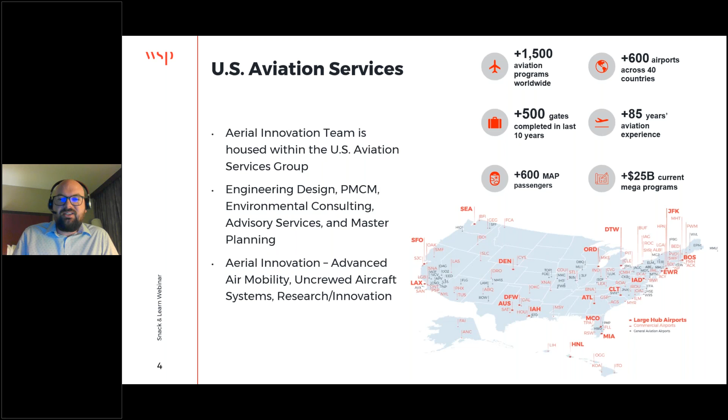Paul did a lot with drones and how drones are used across state transportation systems here in the United States and at airports. And then those last two, perhaps you joined me in a previous webinar. I did one with Brett where we talked about how drone package delivery could really help the rural areas in a regional setting for logistical systems, and help with things like food deserts or medical transportation, medical supply transportation, things like that. And then my most recent one, I talked about the scalability of advanced air mobility and kind of what has to happen there.

We talked about some best practices and planning for AAM from a systematic standpoint. So in a way, these all kind of come together in today's presentation.

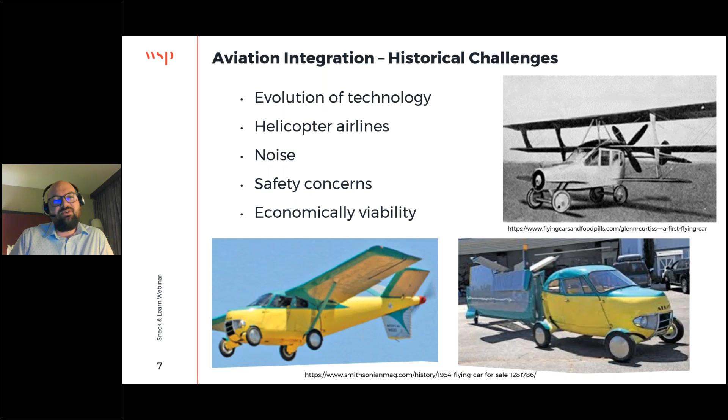And you had an option, through that airline, to add on the flight from the Pan Am helipad to JFK. So it's kind of an add-on to your ticket. New York Airways had partnerships, and you could go to the Pan Am building to fly in a helicopter to JFK. These are still happening today, but on a smaller scale. It was really a robust, scaled operation back in the 50s, 60s, 70s.

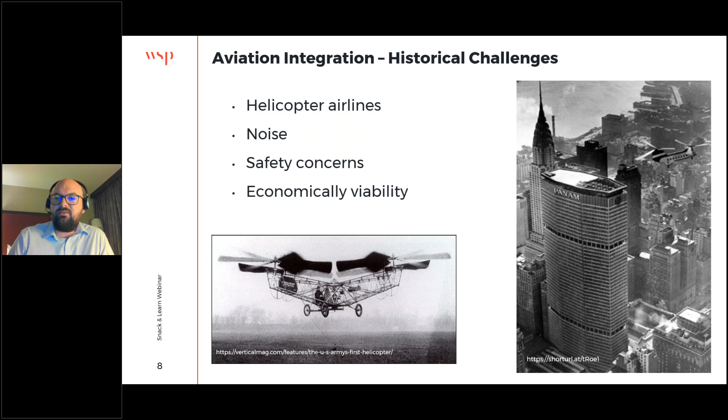So these are some of the historical challenges that lay the foundation for a few other things to discuss. This leads to the discussion of why advanced air mobility is different. Maybe it is, maybe it isn't, but here's some key things to realize: we've had big advances in technology, obviously. One of the biggest examples we can point to is distributed electric propulsion, or DEP.

On a really basic level, this is just what it sounds like: distributed propulsion across an airfoil, for example, a wing. This has been studied for almost two decades now, and the electric side of it has really helped make this possible.

Battery technology is advancing and will continue to do so, as far as the range of batteries, how light they might be to accomplish those ranges, and the safety around them, things of that nature.

Alternative fuels is something we're always looking into as an aviation industry to become more efficient and more environmentally friendly. And then there's technology around autonomy and how autonomous things can be.

So those are, from a technology standpoint, a big factor. Other driving forces behind these movements include cleaner, more sustainable transportation from an environmental standpoint, but also having a robust transportation system for the growth we're seeing in urban centers.

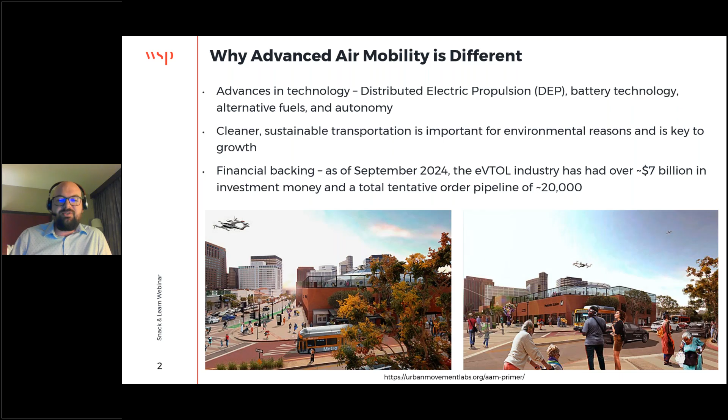But again, it just shows the tremendous financial investment and support at this point. So keep some of those factors in mind as we continue through this discussion.

Really quick on use cases: those technologies I've discussed enable different types of aircraft that then enable different types of use cases. This is a fun graphic from NASA that's been around for several years now. As you look around the graphic, you can see the different types of use cases that can be enabled, whether that's small drone package delivery, urban operations, or a regional operational model.

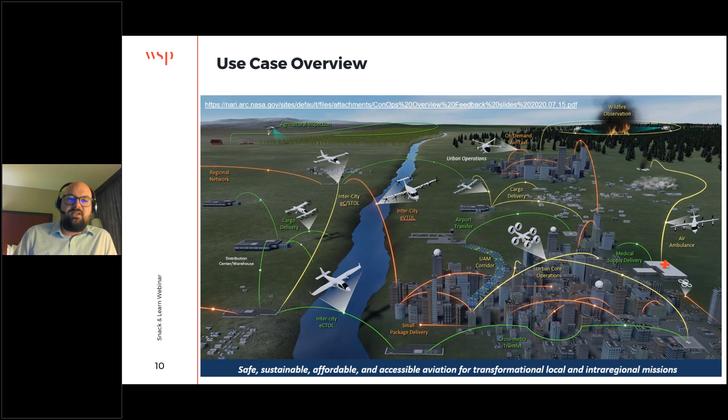Helping with all sorts of use cases, like in the background there, wildfire observation. As firefighters fight those wildfires, what kind of data can be collected with drones to help provide them information to make data-driven decisions. So all sorts of fun things can take place and are taking place across many of these use cases.

I always use advanced air mobility as an umbrella term. That's how it was meant to be when NASA came out with that term in 2020. So this is really inclusive of those technologies and these various use cases.

Here's a sampling of photos of different companies, of different aircraft. As we think about integrating aviation into transportation or logistical systems, we really need to think holistically. How can these technologies or aircraft help address problems we're having, whether that's food deserts or even just the cost of food in general? How can we have a more efficient delivery system to hopefully lower those costs, for example?

Whether that's smaller drones like you see there, or on the left the MightyFly, or on the right the Pyka drone there - these are larger aircraft that can deliver larger or heavier payloads across longer distances. Or it's also use cases like electric aircraft for flight training to lower the cost of that, or on a regional component with the Eviation Alice as an example, or that top right, a proven aircraft airframe, a Cessna Caravan that is fully autonomous, showing what autonomy can do for various use cases.

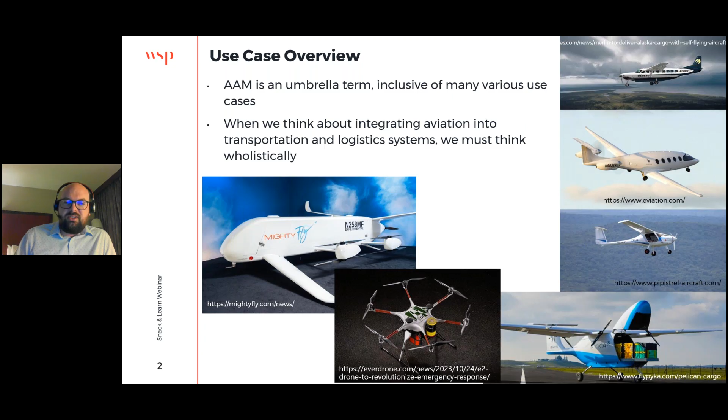So these are all things to really be considered. The one I'll focus on a little bit more as we continue the discussion is eVTOLs, or aerial taxis.

So diving into our projects - as I said at the beginning, I'm going to talk about three different projects. They're all quite different, but they all have this similar thread that I hope I can pull through as we talk about multimodal transportation. The first one I want to talk about is ACRP Research Report 275.

So for this global audience that we have today, ACRP is the Airport Cooperative Research Program. It's one of multiple research programs housed within the National Academies of Sciences, Engineering, and Medicine here in the United States. They fund cutting edge research projects looking at emerging technologies across transportation, and often publish guidance manuals, the first of their kind, to guide what that implementation might look like.

So this was a unique report in the sense that it was a joint report across multiple of those research programs for transit, aviation, and the highway side. And so together they looked at what does transportation look like in perhaps 10, 20, or 50 years from now? It's really hard to predict those types of things, so this really focused on creating a framework for folks to design.

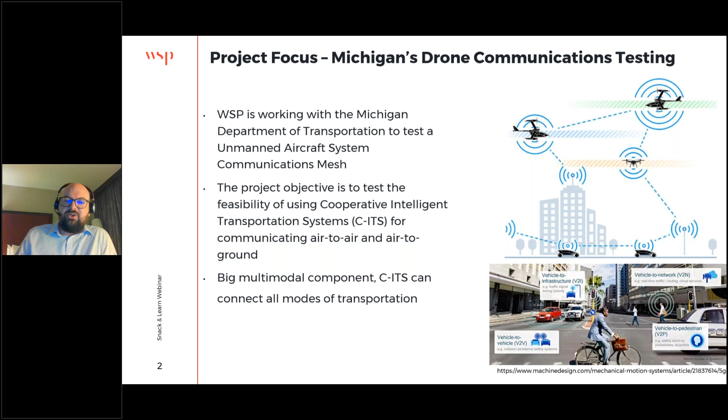So while this is initial testing, this project in particular with the Michigan DOT is to test that wireless technology, specifically to perform radio frequency congestion and communications interference evaluations, coverage, reliability, things of that nature. It's really going to help MDOT support their ongoing deployment of beyond visual line of sight operations with drones.

But really, MDOT has this vision to go beyond this. While this is initial testing, it can lay the foundation for that potential orchestration that can happen at the transportation hubs of the future, really coordinating air and ground vehicles at those multimodal transportation hubs.

You can think of it: if a train or light rail is arriving with 50 or 100 people at a transportation hub, and they're getting off at that stop, what transportation options do they have? Whether it's ride share, micromobility, or in this case an aerial taxi, if there's a vertiport as part of that transportation hub. So how can we really communicate and orchestrate a seamless travel experience across the travel ribbon to have a more efficient and robust transportation system?

Again, the technologies are there. It's exciting to think about what that could look like 10, 20, 30 years down the road. Those are the types of things we want to work together to figure out across the different modes of transportation. The last project I want to highlight is one that's doing a really good job of communicating across silos. In the transportation industry, people become experts in their own thing and just focus on that one thing. But an opportunity that advanced air mobility in general presents is this opportunity to start really working together. I know collaboration is kind of a buzzword, but to really truly collaborate across different transportation modes.

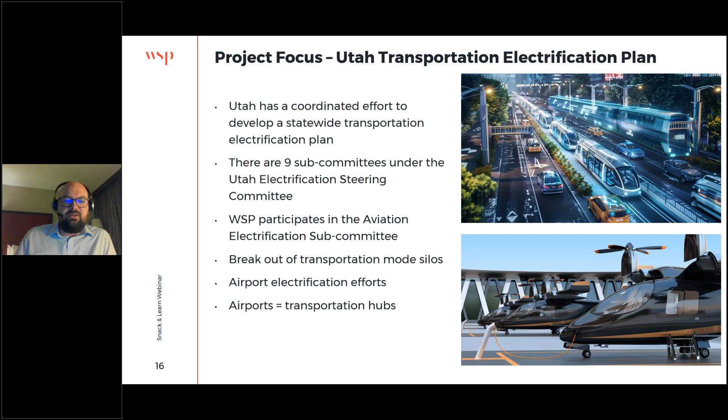An example: if we're going to electrify the airport and bring more electrical infrastructure there for charging aircraft, how will that also serve bus fleets or cars, things of that nature? They're doing a great job, and we're enjoying participating in those efforts. So those were 3 different projects, but all focused on advancing the multimodal transportation hubs of the future and how aviation can fit into that.

Hopefully some takeaways you've had today: advanced air mobility really is inclusive of various technologies and use cases, and all of those should be considered when we're talking about planning, logistics systems, cargo systems, transportation systems. We really need to break out of those silos to figure it out together, and look at how aviation can augment existing systems, not come in and replace anything, but really work together.

To serve humans - that last point is really big for me personally. It's why I love working in this space: at the end of the day, we want to figure out how to better the lives of people, so that people can choose to live where they want to live, have access to healthcare and food, things that they need. How can these technologies really help support that, and not just for a select few, but for all people - that's really the goal.

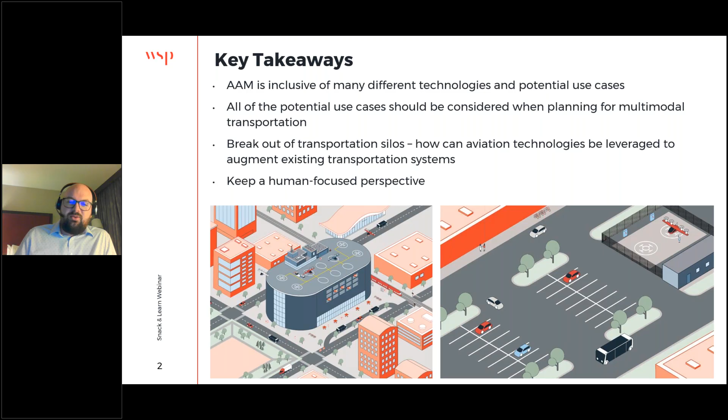So with that, we will now take some time for questions.